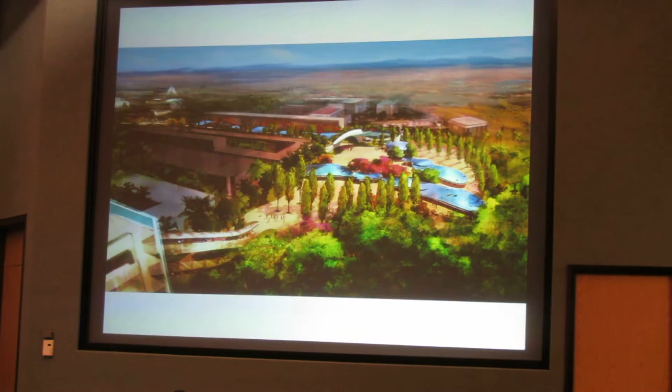Big picture, the Eastern Gateway project is a project that's 20 plus years in the making, as Linda alluded to in her presentation. The project is an important part of Disney's ongoing commitment to deliver a fantastic guest experience for all guests at the Anaheim Resort, and also to consolidate parking on the east side of the resort, which right now lacks a consolidated parking solution like the west side has in the Mickey and Friends structure. This consolidation will also help contribute to the long-term easing of traffic and congestion on city streets on the east side of the resort.

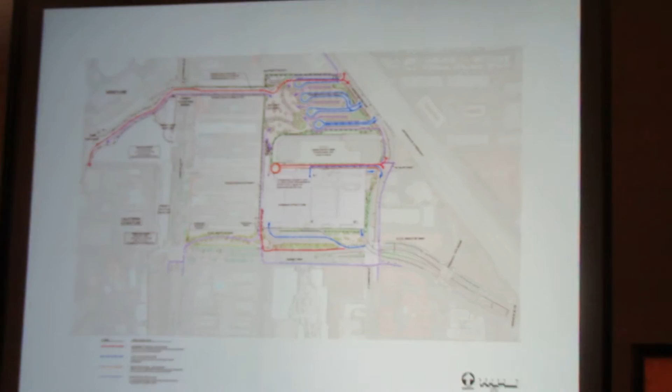First, I'd like to take a moment to walk you through our project and the three key components of it, which Linda and Elaine briefly touched upon in their presentations. Then I'd like to talk about the public outreach process, some of the feedback we've gotten from our neighborhood stakeholders, solutions we proposed, and what we're actively working on right now to improve the project and address some of those concerns. The Eastern Gateway project consists of three primary components.

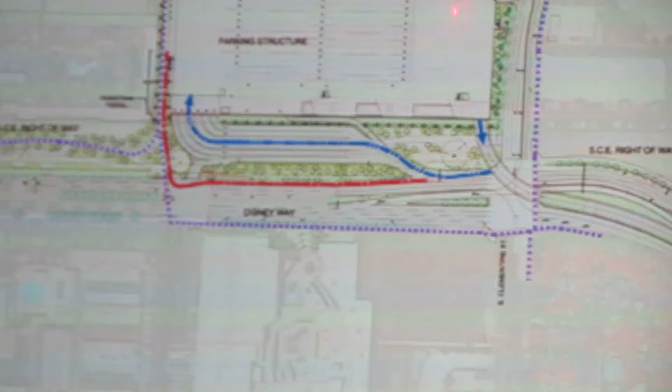First is a parking structure located right here. The second piece is a transportation hub located here, and then a pedestrian connector crossing Harbor Boulevard here, with additional pedestrian circulation down here to the south off of Disney Way on the Southern California Edison right-of-way.

First, I'd like to talk a moment about the garage, the first component of the project. The garage right now is currently contemplated to be approximately 6,900 stalls in 7 stories. As indicated originally, the garage is designed primarily to handle traffic coming from northbound Interstate 5.

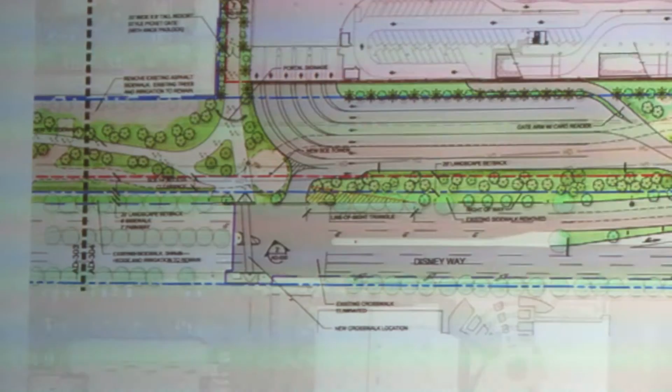Traffic will exit northbound Interstate 5 off of the Disney Way off-ramp on either the HOV or the normal travel lanes. Traffic will proceed north along Disney Way through this intersection here, which is being improved, and will enter the garage queuing area through these 2 lanes to the right of Disney Way on the north edge. Those 2 lanes quickly fan out to 6 lanes and then turn into the garage, where it fans out to approximately 15 to 20 stacking lanes for stacking and queuing before the toll booths. This queuing and stacking provides over 500 cars of queuing and stacking to assure that there is no chance that we will back up onto Disney Way and further exacerbate the traffic problems.

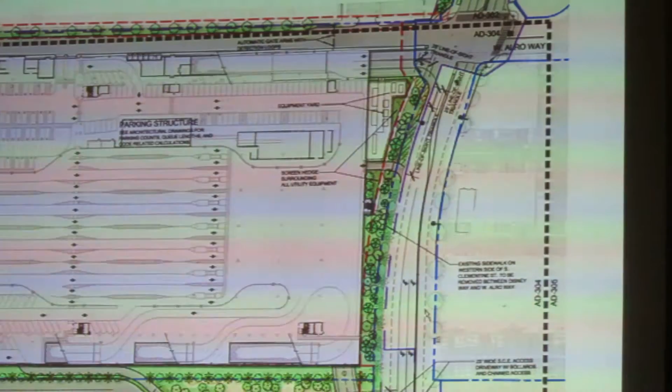Once vehicles proceed through the toll booths and the queuing, they go up the ramps into the upper level. They are directed into a stall in a speed parking configuration very similar to Mickey and Friends is today.

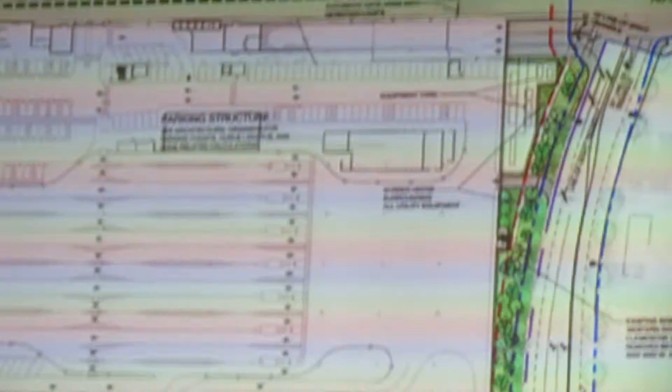At night, when the exiting time occurs for the park, exiting will be handled through 2 primary means. First is a 2-lane flyover that exits the garage at the southeast corner at the 3rd level, which crosses the intersection at the corner of Disney Way and Clementine, directing guests onto southbound Disney Way and onto I-5 on their way. The other exit is on the north, onto Manchester, where guests can turn south, or there's 1 lane where they can proceed north with a signal as well.

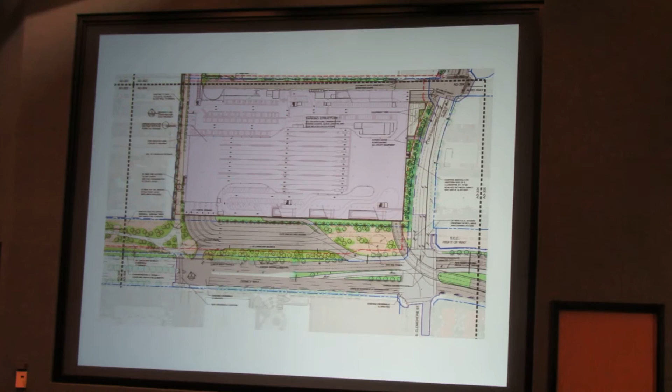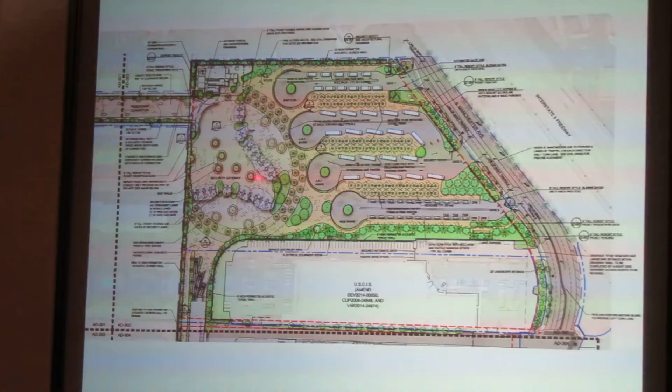Next component of the project is the transportation hub. As a guest, once you've parked in the garage here, you will be greeted by a bank of escalators, very similar to what we see today at our Mickey and Friends parking garage. The escalators will proceed down, take you into our transportation area, where guests will proceed through added guest screening portals and then onto the pedestrian connector.

Additionally, the transportation hub will collect all of the current rubber tire traffic that brings guests to the resorts, from the ART shuttle, OCTA buses, and local hotel buses. All of those vehicles will now be collected in this area here. You see these varying turnoffs here.

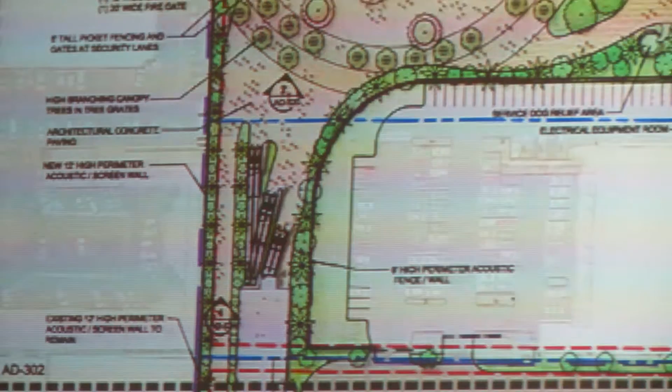Additionally, taxis, personal vehicle drop-offs, and ride-sharing like Uber and Lyft will all be collected here. Guests will get off of the various vehicles, proceed through the screening portals, onto the pedestrian connector, and on their way across the street. The bulk of this activity that occurs here in this pedestrian connector presently occurs in the East Esplanade across Harbor Boulevard.

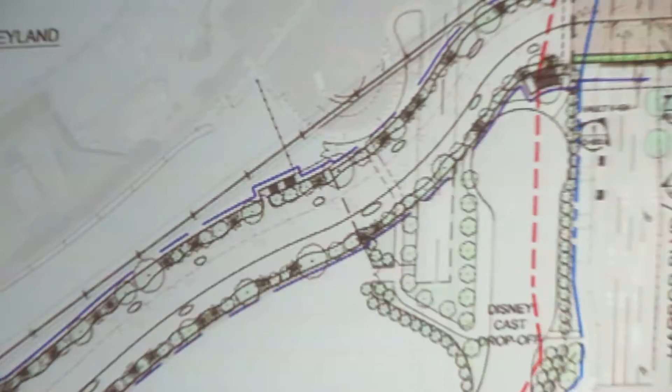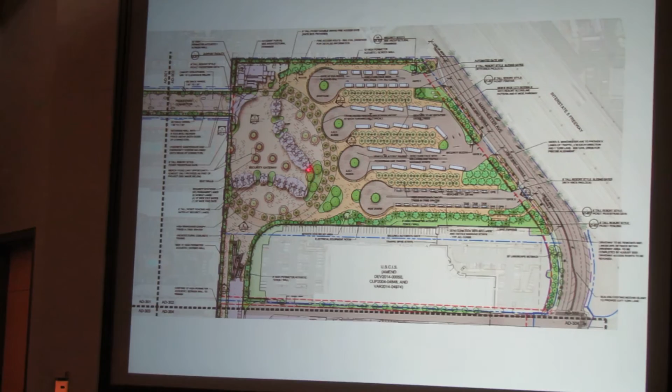The next component of the project is the pedestrian connector. As I mentioned earlier, once guests are out of their vehicles or out of the garage, they proceed through our additional security screening checkpoints, and they begin their travel across Harbor Boulevard on a pedestrian connector, which is a very gentle grade leading up towards Harbor Boulevard, until it ultimately hits Harbor Boulevard, where you cross above grade in a bridge.

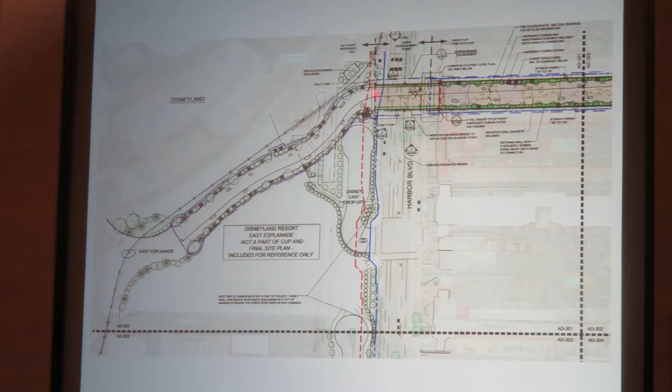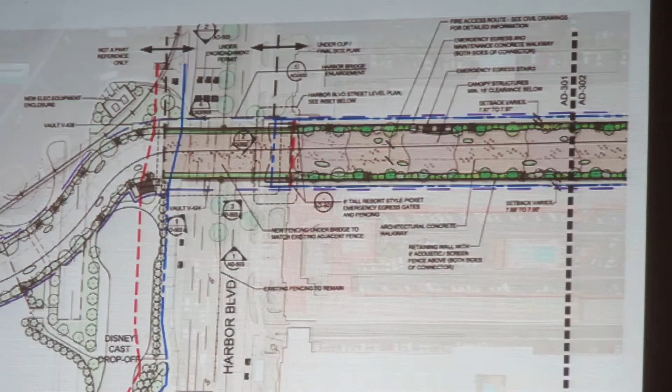Once you cross Harbor Boulevard, you come back down to grade and into the East Esplanade, the ticketing facilities, and entry to the park. This pedestrian connector is a critical part of the project because, as was alluded to originally, the significant additional number of people being brought to this site resort in this one location in a garage, having these guests all cross at grade, would create significant impacts to the roadway network and would not present a very safe solution. So, as in everything we do, safety and guest security is a prime concern for us.

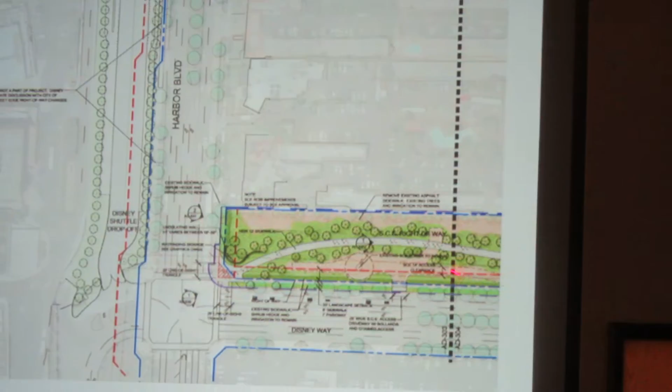Additionally, on the vein of pedestrian circulation, the project proposes to improve the remainder of the Edison right-of-way here at the corner of Disney Way and Harbor Boulevard. This is the area presently being used for queuing and stacking for entry into the garage. Just west of that location, we propose to add additional landscaping and a pedestrian pathway that would take guests along this edge of the project to a connector at the garage and up into the gateway like you saw before.

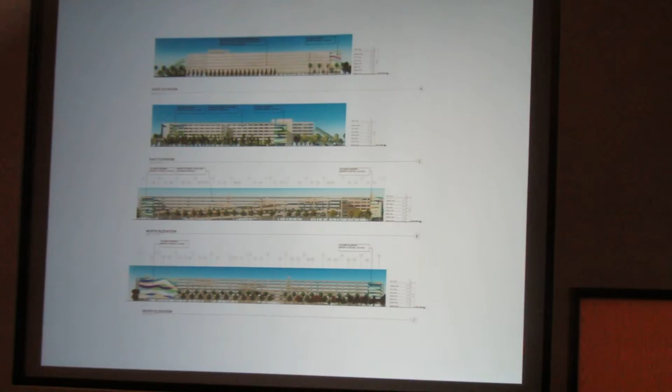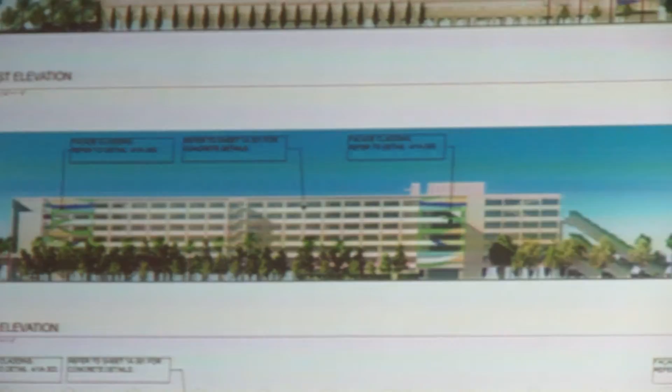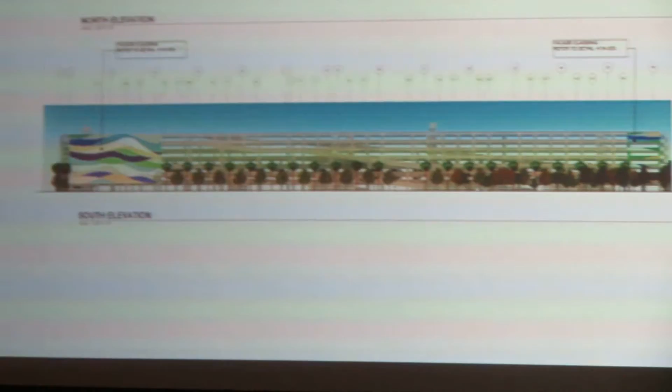The next slide takes you into elevation. Now that we've gone through the three buckets of the project, the parking structure, the transportation hub, and the pedestrian connector, this is back to the parking garage to show it in elevation and give some idea of the architectural treatment of the facility. Consistent with the Mickey and Friends garage, the team has paid special attention to adding architectural detailing and significant landscaping and architectural treatment to the garage to make it visually appealing and not a monolithic block sitting in the middle of nowhere.

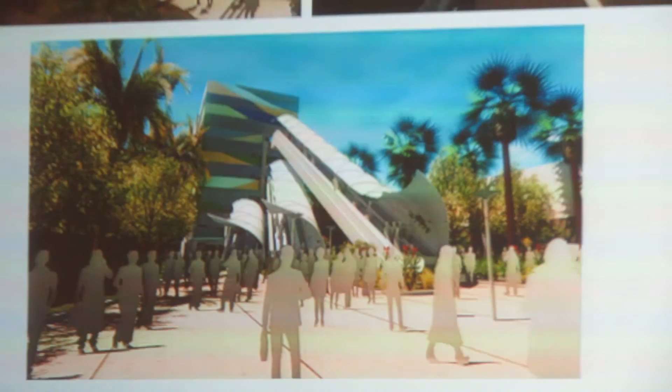Next slide, please. Here's some perspectives. This perspective in the upper left corner is looking to the northeast as if you were floating above Disney Way. So you can see the queuing and stacking entering the garage here.

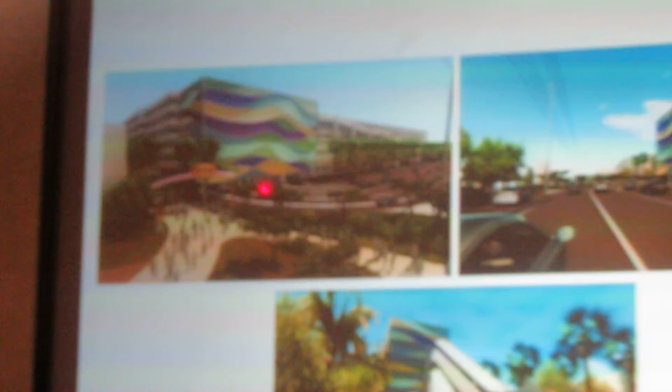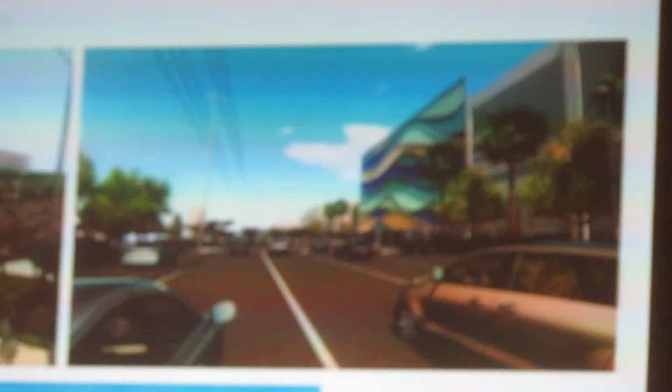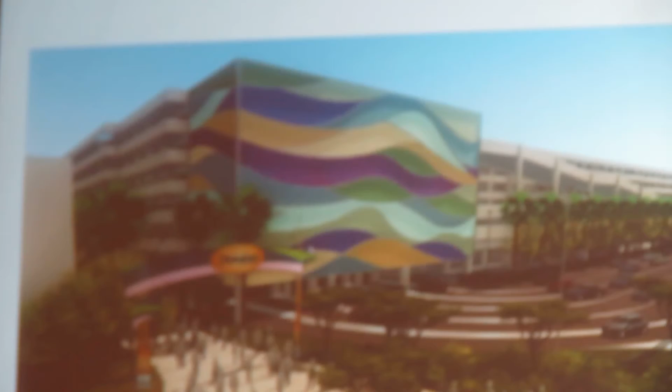I want to take a moment and talk about this architectural treatment right here. This is a fabricated and painted metallic structure that looks very similar in paint color and condition to the Team Disney Anaheim building you see facing I-5. It's intended to create some visual interest, and it'll look nice at night when it's lit up, breaking up this giant monolithic structure.